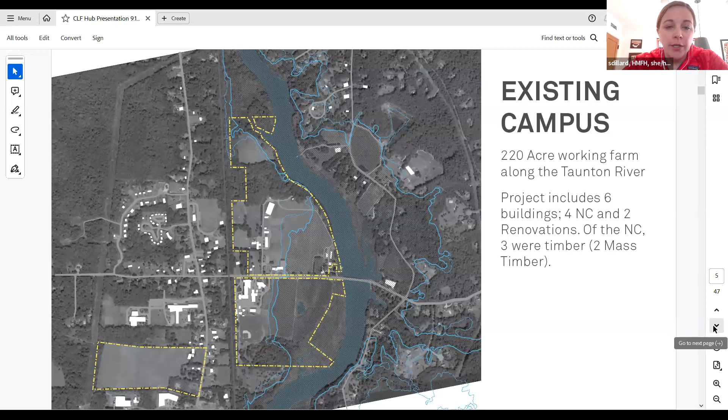This is the existing site plan, so I'm going to zoom in a little bit. Actually, I'll go back - hopefully you can see the blue lines. That's the floodplains. We were pretty limited to where we were going to build, and plus it was a working farm, so a lot of this was slated for agriculture and needed to grow crops for the farm that the school runs.

So existing site plan here. This is the new site plan, and we'll be talking about building 3, which is CSE, and building 6, which is Gilbert Hall.

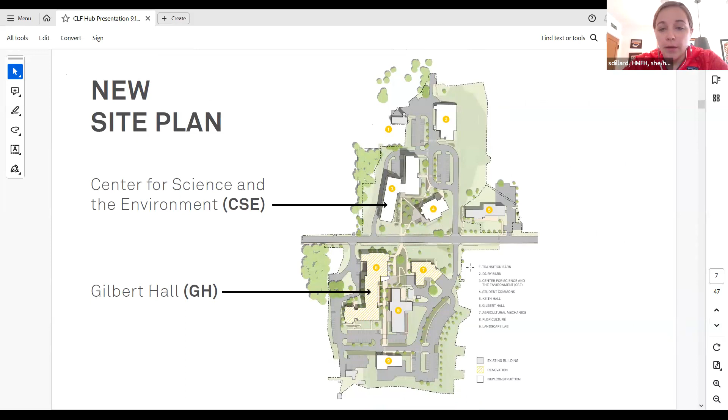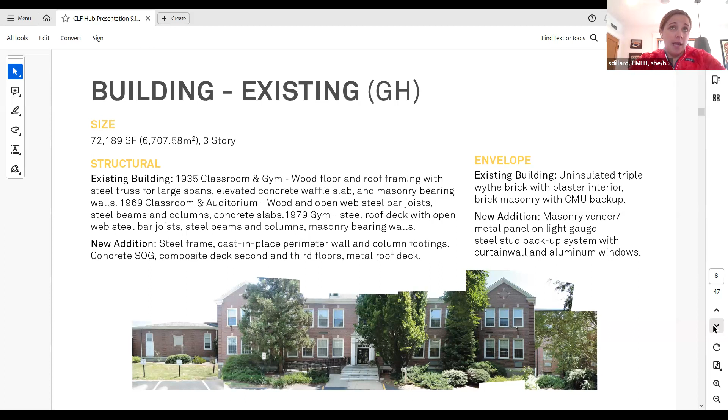A little bit more about the existing building. The main facade, shown in the photo, is the existing building, and it's primarily timber, but it has masonry bearing walls, and then there were a couple of additions. So there were just a myriad of structural elements on this project - we had waffle slab, wood framing, steel framing, and there's quite a bit going on. The new addition to this, which created a vertical circulation tower, is exactly the same as the new construction project.

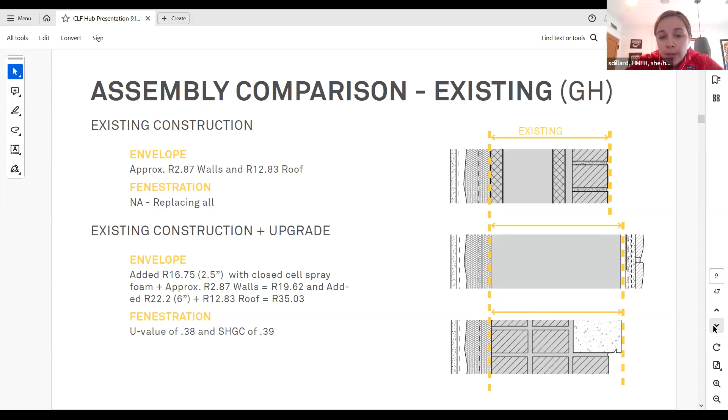Here's a little makeup of the envelope. We did upgrade the thermal properties of the envelope. We worked with an envelope consultant and a masonry expert to figure out the most appropriate intervention for this particular wall. And this is just what it's made of.

This is the Center for Science and the Environment. It's a steel frame, cast in place perimeter wall and column footing, concrete slab on grade, composite deck 2nd and 3rd floors, and metal roof deck. The envelope: masonry veneer, metal panel and light gauge studs back up. We've got aluminum curtain walls, and sloped standing seam aluminum roof. The flat roofs are all EPDM membrane. And the vegetative roof - there are 2 vegetative roofs on this, and they're all fluid applied.

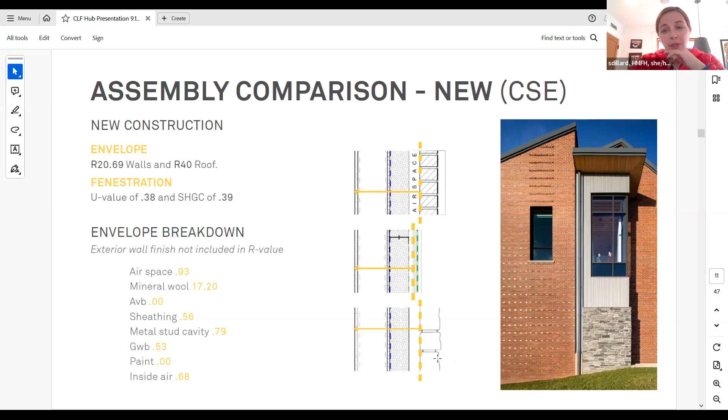This is the envelope for new construction. So there's brick, metal panel, and stone. We're trying to fit within the vernacular of the agricultural school, and pull in nods of stone from the stone walls that were built to hold in a lot of the animals way back in the day.

So for both life cycle assessments, we used Tally. We felt pretty strongly that we don't have enough information to really go for the full scope, although we did analyze the whole building for the full LCA.

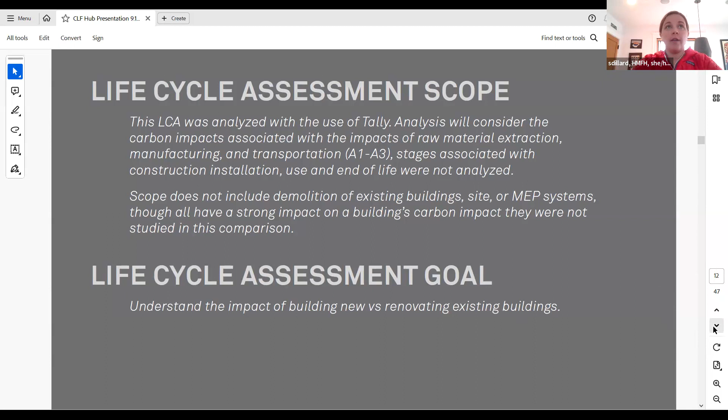But this particular presentation is really only going to cover the A1 through A3 stages. And we didn't include demolition, site, or MEP, for some obvious reasons that I'll go through. The goal of this impact analysis was to understand the impact of building new versus renovating when it comes to just pure materials. And here's a graphic describing the stage which we were analyzing.

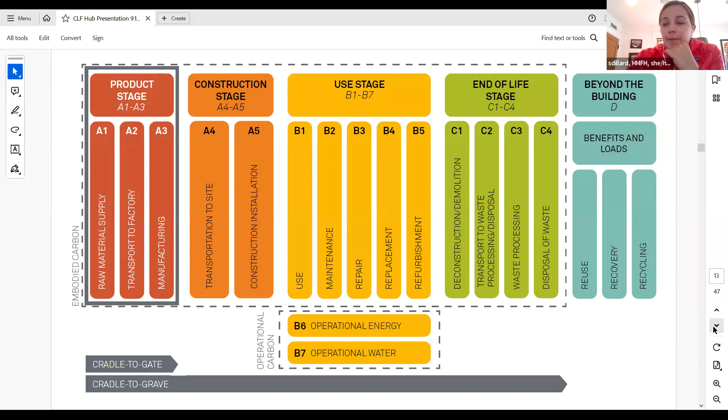The reason we're primarily looking at stages A1 through A3 is that at the time, the baseline from CLF was for that life cycle scope, and we didn't feel like we had enough information to go much further than that. At the time, the benchmark for schools in North America from CLF was 230 to 460 kilograms of carbon per meter squared. That'll be important as we keep going.

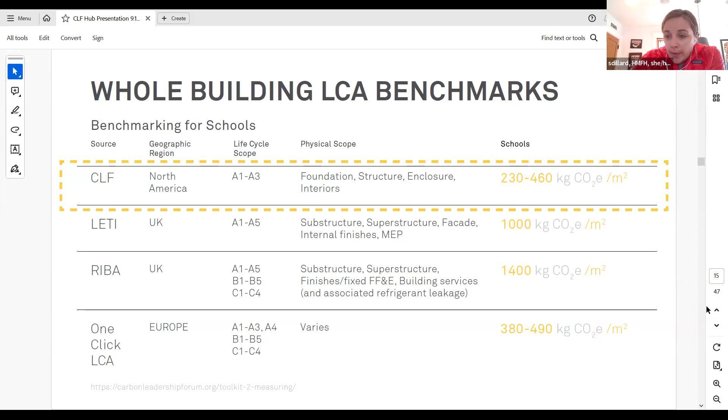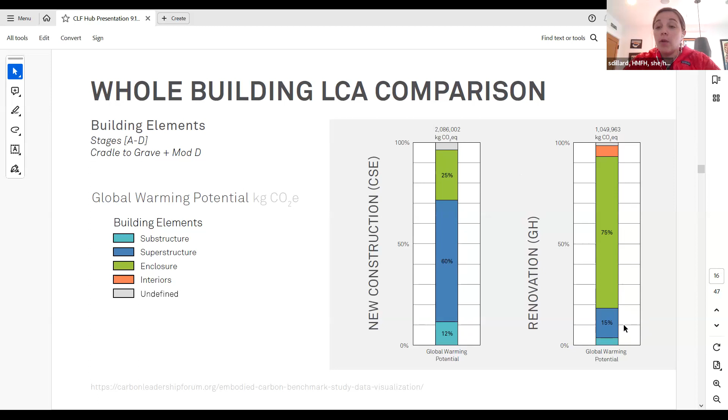This is the whole building comparison, showing all stages, just to give a little understanding of the different building elements and their impact across all stages in an LCA comparison. It's pretty interesting to see new construction versus renovation, realizing that most of the impact for new construction is in the superstructure, whereas with the renovation, the superstructure was primarily there already, with a few modifications. So we're really looking at the enclosure and what we're doing as an intervention for the renovation. Here are the basic numbers.

What I found pretty interesting about both of these is that they're both under or below the CLF baseline at the time.

We worked pretty hard on the new construction portion of the project to find efficiencies in terms of footprint, so that we weren't building all sorts of crazy in and outs, and the footing wasn't crazy. Our structural engineer halfway through the project switched, and the new one was fantastic, basically redesigning and cutting out about a quarter of the steel in the project. So working with the structural engineer to make sure we were building the structure efficiently too was incredibly important.

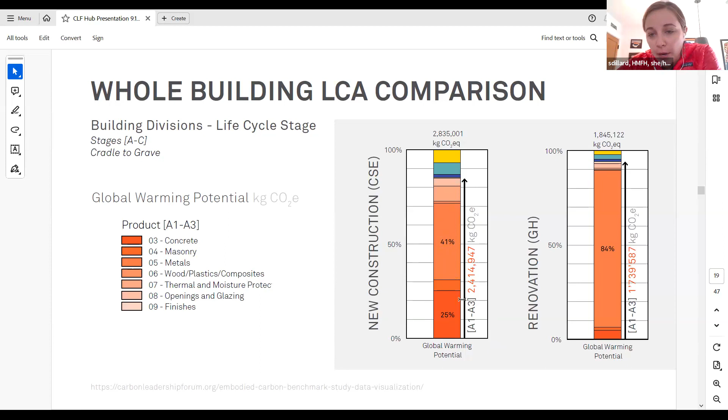I'm going to go into some of these materials a little more specifically. Concrete, masonry, and metals are pretty high on both of these graphs.

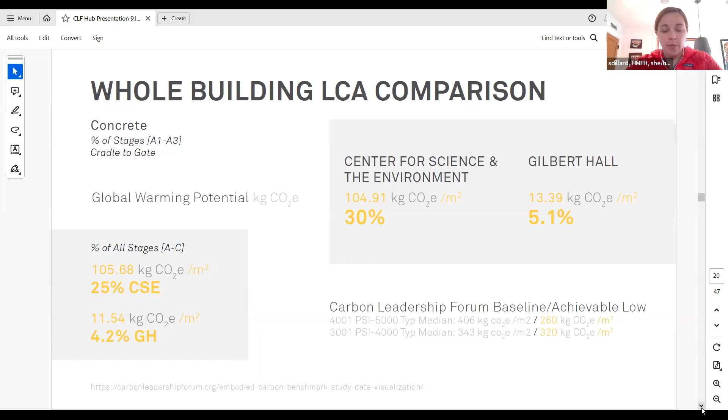Concrete specifically: the makeup of the embodied carbon within the analysis for the Science Center, 30% was attributed to concrete, obviously because we built a new structure. In the renovation, only 5.1% was attributed to concrete. So it's pretty interesting to see the impact on different materials in new construction versus renovation projects.

With the metals, it's still pretty high with the new build, but significantly higher in the renovation, because that was the major intervention — building an interior partition that held the insulation for the entire envelope. That's about 89% of the embodied carbon contribution to the material stages of this project.

It's important to note that industry standard has a pretty high recycled content for metals, so we really do have to work at reducing that number.

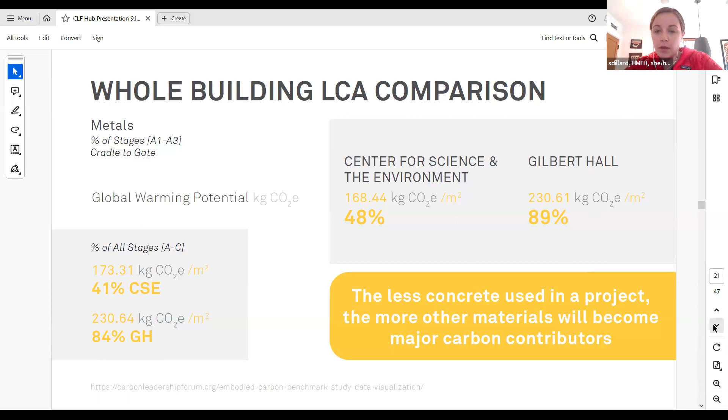In simple terms, do we build new or renovate? For this particular project, it made a lot of sense because it was in excellent condition, and we felt it was the right approach. This analysis was done after the fact. We did take some steps to try to reduce materiality within the new build and the renovated project, but there wasn't really a question for us on this one — we were building new and renovating, so it created a great opportunity for understanding the difference between the two.

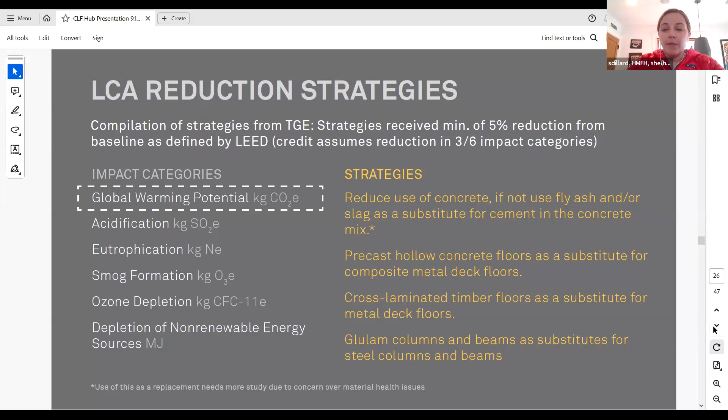This is our start, or attempt, at trying to encourage other people to explore strategies for reducing their embodied carbon. So this is the beginning of thinking about what that workflow might look like on projects. We talked about different strategies for reducing carbon, and then how we would use these to inform design, both in specifications, through baselines, and then the different kinds of analysis tools available.

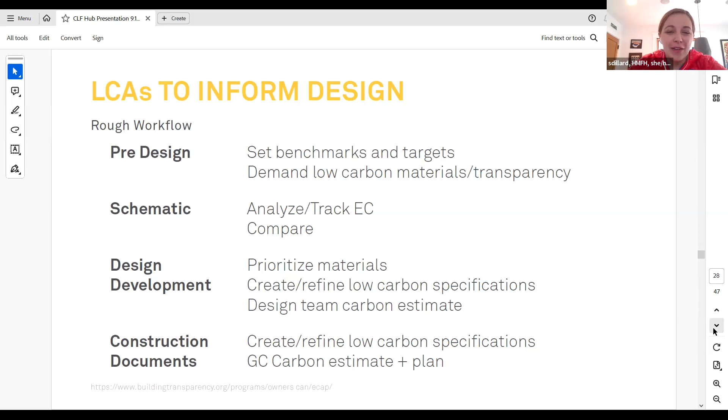We specifically use Tally. I haven't actually used any of the others except Kaleidoscope. And then here's the rough workflow, and I'm very excited for you to see Aiden's new workflow, because these are just very basic things that we started to look at in the process.

Yeah, well, I mean, they are basic things, but they're important things. But this summer, I really just dove directly into the world of workflow and life cycle assessment, and how we can rethink, as architects, how to change our perspective on the ways that we design.

So I started off with just thinking, okay, I'm going to create this large booklet resource for the whole office to be able to use. So I wanted to start with life cycle assessment fundamentals.

The very first thing is I wanted to define for everyone, like, why life cycle assessment? What are we doing? What are the reasons? This way everyone can get an idea of why to be conscious about it in the work that we do, whether it's environmental responsibility, trying to find cost savings for our clients, or even just thinking about designing for the future, for disassembly, or all these new ways of designing.

Next, along in this booklet I put together a few different key concepts. For example, the environmental impact categories, explaining what they are, why we should be thinking about them, graphically showing some cute little icons to explain how it's affecting the world we live in. Because we need to define value in these assessments, and the impact categories are a way to define that value. So it's an important thing to really understand at the start of it.

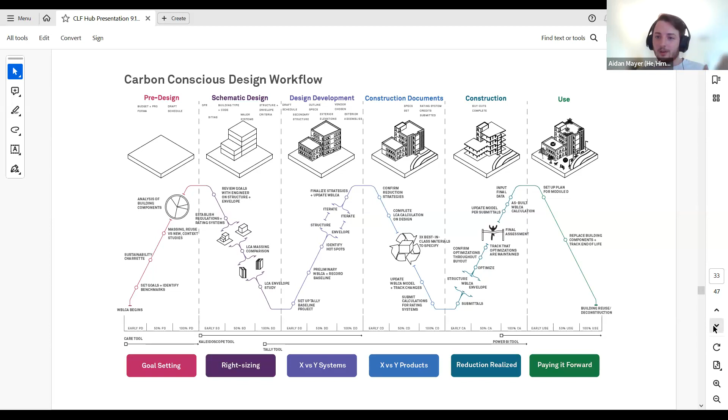Along the way, this drawing wasn't finished completely, but it gives the gist of all the different stepping stones and key points in the process where you should stop and reflect and think: how can we be conscious about the materials we're selecting, the subs that we're meeting with, how can we educate them to decrease impact as much as possible? How can we iterate and find the little circular elements in our design? Yeah, I'm just going to go through that workflow in some fashion.

Pre-design—this is where the most impact can be made for the cheapest. Setting our goals, really communicating and acting as soon as possible can always lead to a dramatic decrease in whether it's carbon footprint or selection of healthy materials. It doesn't matter, as long as our mind is in that headspace, these projects can really advance.

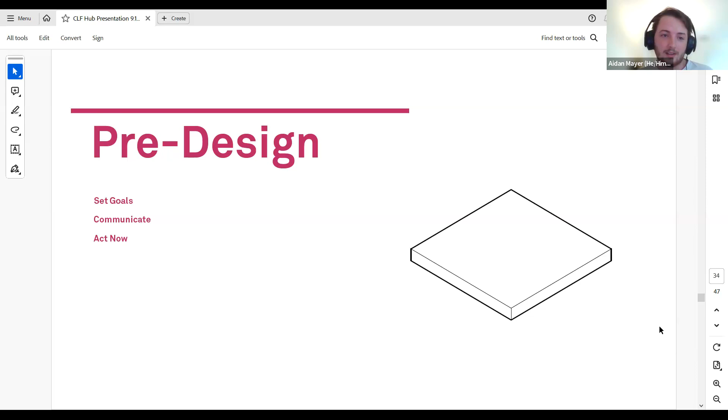And then in schematic design, we're starting to get a form together, understanding the building we're making. So we're learning to optimize and compare as many different strategies as possible, and progressing forward to constantly think, how can we make this even better?

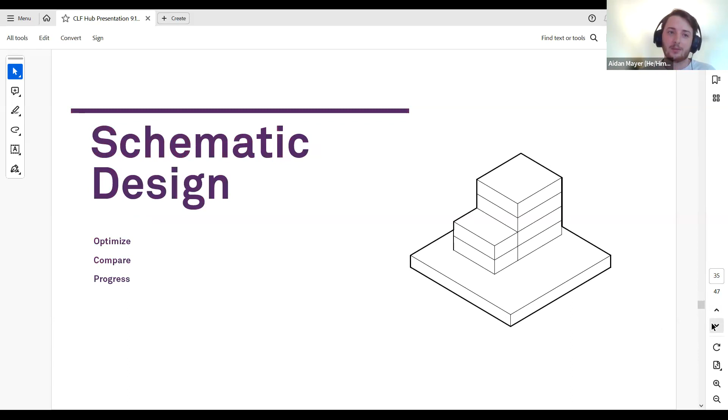Design development, this is where HMFH uses Tally. So we're thinking about that Revit template file. How can we have previous systems that we've performed life cycle assessment on, how can we keep them and reuse them and shorten the process?

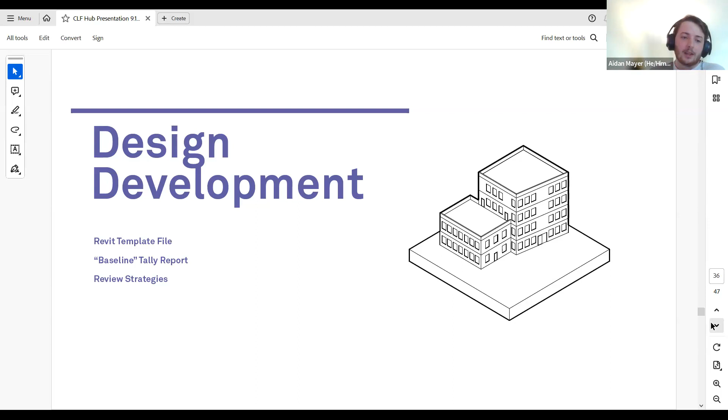But also creating that baseline whole building assessment report, just so we can kind of gauge somewhat where we are and whatever impact we're looking into. But we're also reviewing the strategies and the goals that we set with the client, with our structural engineer, whoever, and just still moving forward.

Construction documents, now we're starting to really look at materials and pick the materials, refining the model, confirming that the strategies are going to work, and making sure that it's outlined for the beginning of the project actually being built.

Construction, what I found, it's mostly about integrity and tracking and making sure that everything that we designed for actually is happening and implemented, whether it's procurement or not. But at the end of construction, performing that whole building life cycle assessment once again, and just make sure that everything we designed for is as accurate as possible. Did we do a good enough job? Where are the pitfalls? How can we be better in the future?

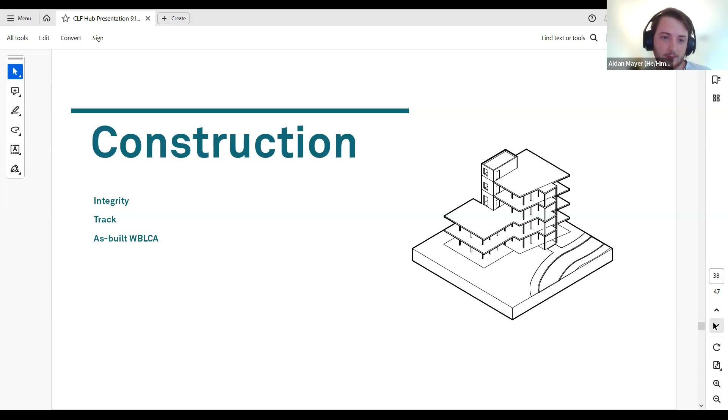And then use, this is sort of the mystery feature of the process, but we're handing off this new building. How can whoever's in that building think about this as well? How can we educate them on the systems that were put in?

How can we educate through signage for, say, students, but also following up and making sure that there's even like a plan for replacement, because replacing and maintenance, that's another part of the life cycle assessment. And then also the end of life of the building. Is there a plan in place? Is there any considerations? Yeah.

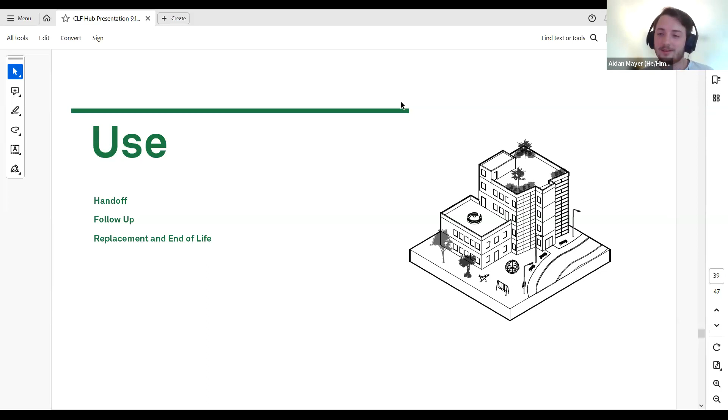I investigated a variety of tools that were being used, that weren't being used, that even are in a beta stage of development. And really, I just wanted to find a way to match the actual tools to the workflow that I had put together.

So at the beginning of the project, like I said, you're planning, you're trying to make these decisions. The two buildings that Sunny just talked about, retrofit versus not new construction, there are resources to investigate that.

So the CARE tool, the EPIC tool, a quick way to one-on-one with Heather. I know you need every minute. Quick way to look into if the decisions you're making are the right ones. So these were good tools to use.

Then looking at the concept formation and confirming not only the carbon impact, but also just the environmental — say for Climate Studio, you're looking at the daylight availability, but then there's new tools like Autodesk Forma, which show ways to automate that process and use generative design and quickly make massings that you can then perform life cycle assessments and compare the different strategies. So this is a good way to use that at the start of the project.

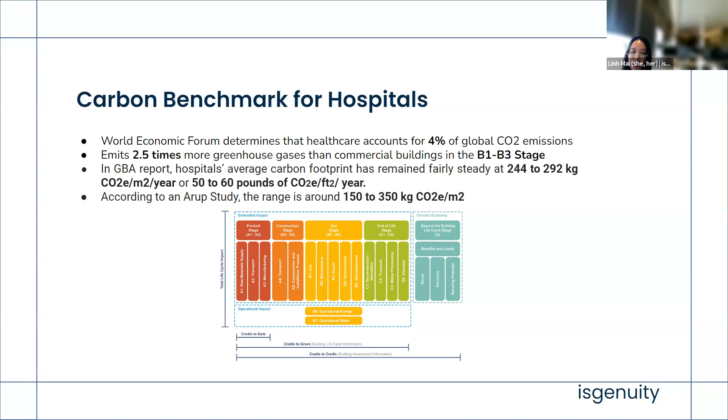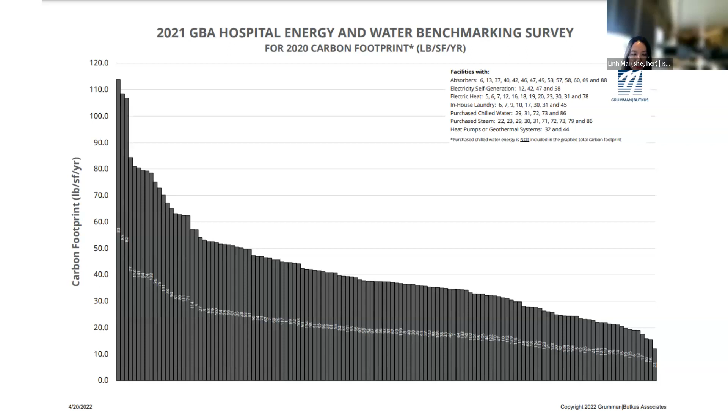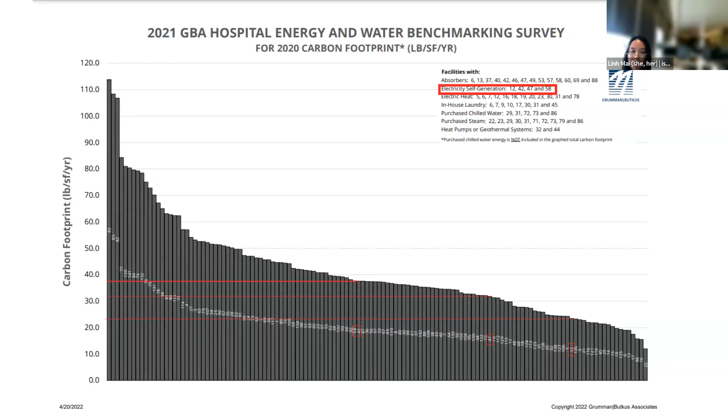I want to show this graph that Grumman Butkus Associates put together, showing where all the healthcare projects they examined lie based on the carbon footprints they produced. It's a wide range, but the average is mainly around 50 to 60. It's also important to see that for on-site electricity generated healthcare projects, they have below average numbers. So on-site electricity generation does matter, and also heat pump and geothermal systems, which bring it down to like 30 and 20 pounds of carbon equivalent per square footage per year.

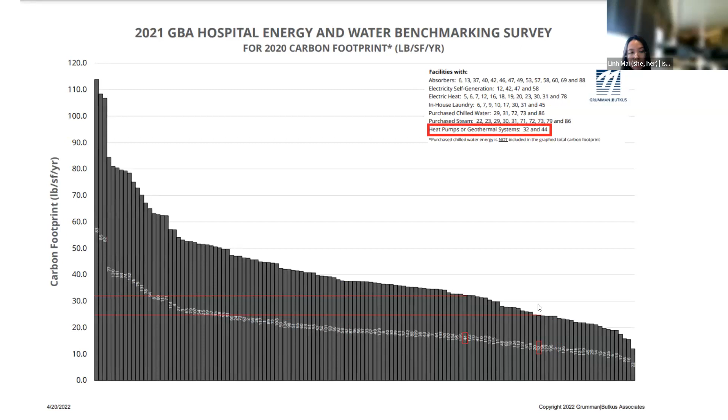I spent a big chunk of my time at Strategy looking at schematic design carbon tools - Cove, Beam, Zero Guide, EPIC, and Kaleidoscope. I love the tools we already talked about. It's great to use this during the schematic design stage to understand what are the low carbon materials and make product decisions in the early design phase.

Some of these tools also provide client-ready results, which is great, so you can bring these in during client briefings or presentations and show how much impact a material change or a decision can make. Talking briefly about Kaleidoscope, this is an apples-to-apples tool looking at all environmental impacts or just the product stage. It's fairly easy to use, about 15 minutes, and I was a beginner when using this, so it was very beginner friendly as well.

My favorite part about this tool is that you can make your own wall assembly or floor assembly and start to see how much carbon impact each assembly has. They have a little calculation tool when you scroll down, and then we also look at Epic, which is a pretty terrific tool.

We create scenarios to decarbonize the projects, and then we can compare the scenarios, assess embodied carbon and operational carbon of the project over a 30 year lifespan. Still pretty easy to use, which is great news, and also gives client-ready results with beautiful graphs and pie charts. It takes around 15 to 30 minutes to use, and you do have to input a couple of data points, like the footage of your building, whether it's steel frame or concrete, or whether it's on-site electricity or mixed use energy.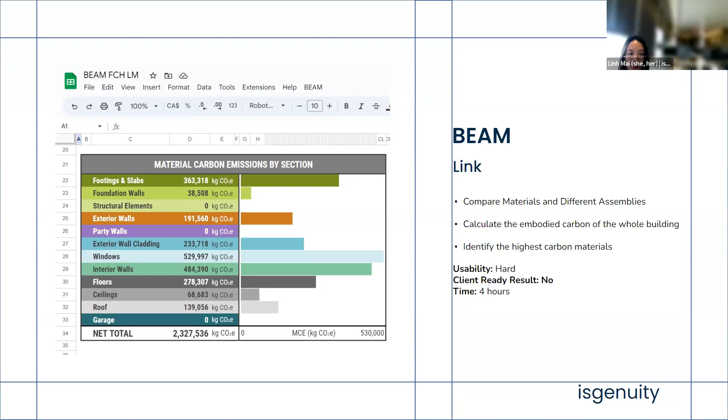And then the Care tool, which allows you to compare do-nothing versus new building retrofit. But we already covered that, and it also lets you set targets, which is awesome.

Zero Guide tool helps you estimate embodied, operational and transportation carbon. Then you can assess whether your project achieves ILFI net zero or a certain LEED rating. But I find that not that reliable, so don't rely on it too much, though it can give you a rough idea.

And probably easy to use. It takes around 30 to 60 minutes, and I think graphically this is the most beautiful tool. It also lets you know whether the carbon impact of your building is within a better, good, or baseline range, which is awesome. But it's not that accurate because we don't get to input that much data into it, so it's really just a rough estimate kind of tool.

For a company, I did this chart to compare all the tools, so we know what to grab for what stage of the project and for what purpose we're doing. So if we want to do a material comparison, maybe it's a good idea to use either Beam, Kaleidoscope, or for understanding energy, then Epic and Care tool would be great.

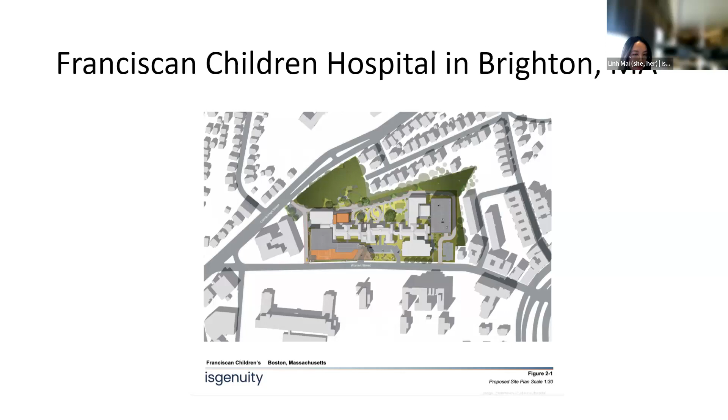The construction of the clinical building will allow for the needed expansion of these services to meet the growing need of children with behavioral and health medical conditions. So these are the results that we produced for the Franciscan Children's Hospital project.

Really it's just that we have an understanding of how to use this tool with the project, and a couple of numbers that we produced. So for Beam, we found out that for the product stage it's around 2,300,000 kilograms of carbon equivalent, which is pretty significant.

But when you put it into perspective, you look at Epic, and then you see, oh, for like a 30 year lifespan, it's like 135,000 tons of carbon equivalent.

Yeah, it's free, just for us to get a rough understanding of how to use these tools and see if the results are consistent throughout all of these tools. And they are pretty consistent since a lot of them share the same data source.

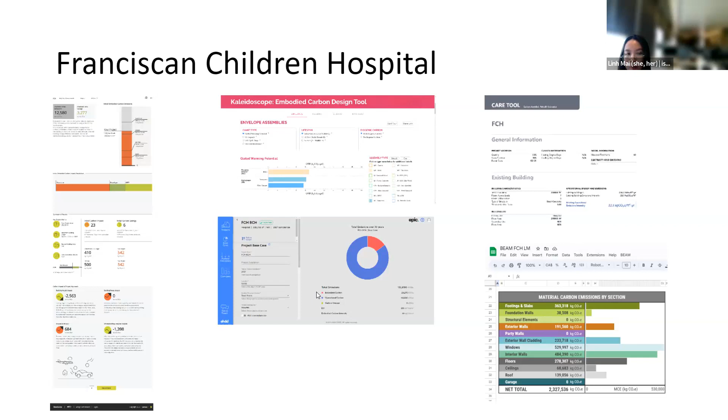And then for the design development and construction document carbon tools, we use Tally, and we did our first Tally analysis with our Brockton project.

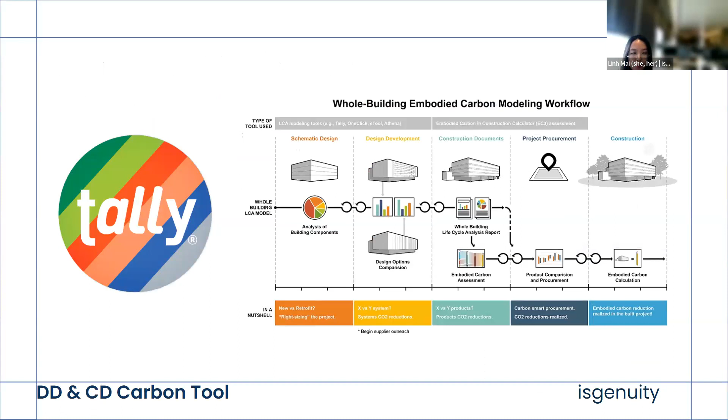Our Brockton project is the redevelopment of a former nursing home, so this is an adaptive reuse project for Boston Medical Center, which allows for the development of 56 locked inpatient behavioral and 26 clinical stabilization service beds, direct access to outdoor courtyard including walking path, shelter areas, gardens, events, exercise spaces, which create ample opportunities for healthy interaction and physical activities.

The hospital location and the demographically diverse city of Brockton represent a meaningful step in addressing mental health treatment disparities among a variety of populations. In addition to representing a significant increase in availability of these much needed psychiatric resources, this project was designed to minimize its environmental impacts.

The combination of adaptive reuse and net zero build results in a sustainability driven facility. This project makes use of the existing building structure, which significantly saves on new steel and concrete while reducing the impact on landfills. The entire envelope was upgraded with a new facade and skin designed to exceed energy code and create a tight enclosure following a passive building standard.

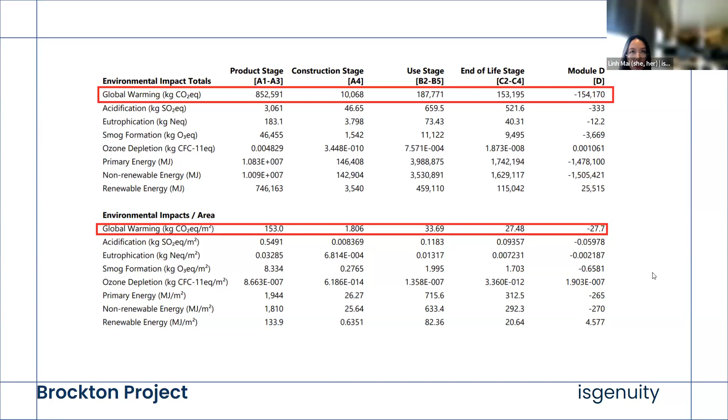So retrofit projects are really more sustainable and have less carbon impact on the environment. We also looked deeper to see - this is pretty consistent across most projects - there's always the product stage that has the most carbon impact, followed by the use stage, maintenance and replacement, and then end of life stage.

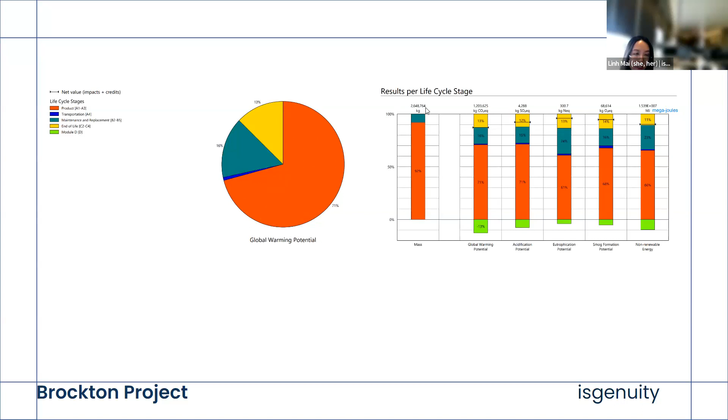And then for these, we also got a glimpse of which category is most carbon intensive. For us, it's the lightweight and structural concrete, which takes up like 30%, followed by wallboard gypsum at around 12%, and then the steel category.

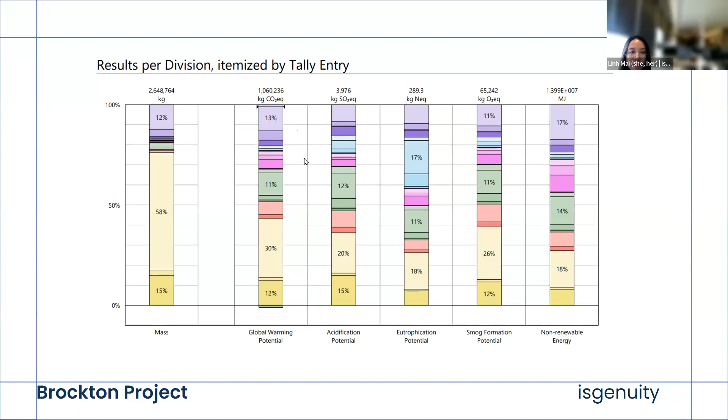And then looking at this as a building overall, it's like 53% of the carbon impact comes from the flooring system, followed by the wall system, which is pretty consistent too.

And that's about it. Nicole, if you want to add anything else - yeah, that's just all I have for my presentation.

Are there any questions from anyone about any of this? That was a lot of information in 50 minutes.

I will just say about the Brockton project, it was a nursing facility originally built in the 1970s, and so the structure was concrete walls on the exterior and on the interior.

And the project team worked really hard to maintain all of those structural CMU walls. They tried diligently to convince the client to use a rain screen system outboard of the CMU to achieve the high performing envelope, but ended up with EIFS.

And so everyone was kind of apoplectic about all the foam on the building and how it had completely destroyed the embodied carbon performance. Then we did the Tally postmortem and realized that the amount of embodied carbon just in the tiny bit of foundations that were poured and the extra concrete used to modernize the building, along with the metals, completely outweighed everything we did on the envelope. So, lesson learned on that one.